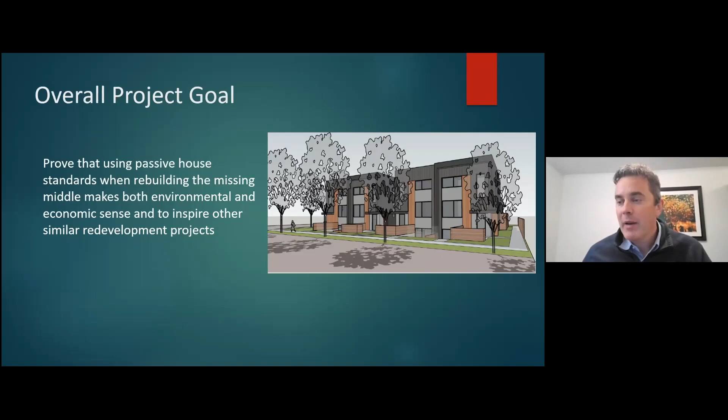But as we're going ahead, there were 3 sub-goals which we tried to achieve throughout this. The first one is to determine what is the marginal cost of doing a passive house build, specifically looking at the mechanical envelope and solar PV. That's something that David's going to walk through later on in this presentation on how we answer that question.

The second one is looking at the 2 different passive house standards that are out there. We've got PHIUS and we've got PHI, and there's many. When we were starting off, quite frequently people said, well, which one are you following? So we explored both, and we're going to walk you through the steps on how we came to our decision on which one we decided to use.

And the third goal that we wanted to achieve was to determine a net zero strategy. Is it possible to reach net zero in our development with passive house? And if not, how close can we get? So those are the 3 goals, and throughout the presentation, we'll be answering these three questions.

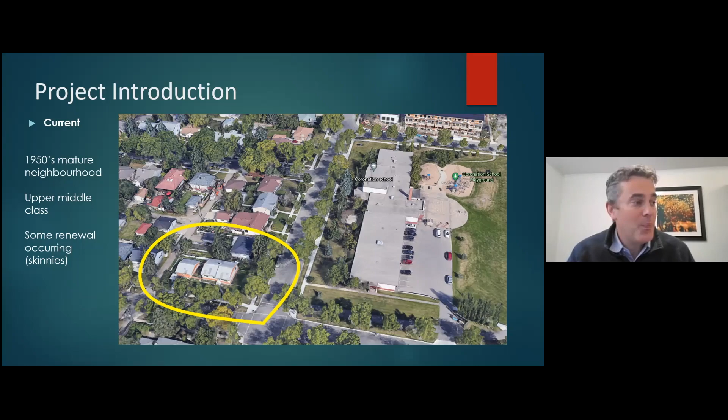We have two city lots adjacent to each other, right across from a school in the middle of a neighborhood. You can see an overview here - it's basically a typical 1950s style bungalow, approximately 2 single family homes, with a total area of 13,500 square feet, side by side adjacent to one another.

We just tore down these homes this past week, so now it's just two empty lots, and we're ready to get going here.

Our vision is to develop a multifamily build of 16 homes, mixed with 1, 2, and 3 bedroom units. They're about 2.5 stories tall, and 2 of the units will be fully accessible. We want to make it accessible and appealing to different segments of society, not targeting one particular group - this can be anywhere from university students to retirees to families, so we want a diverse group of people living here when it's done.

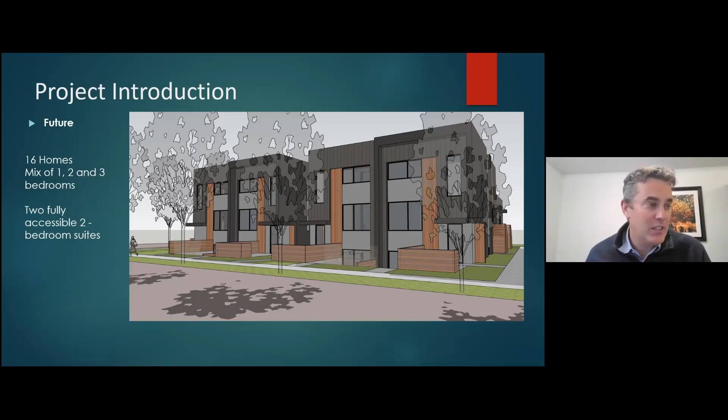David, I don't know if you have any more comments you want to add to this particular picture before we move on. No, I don't think so.

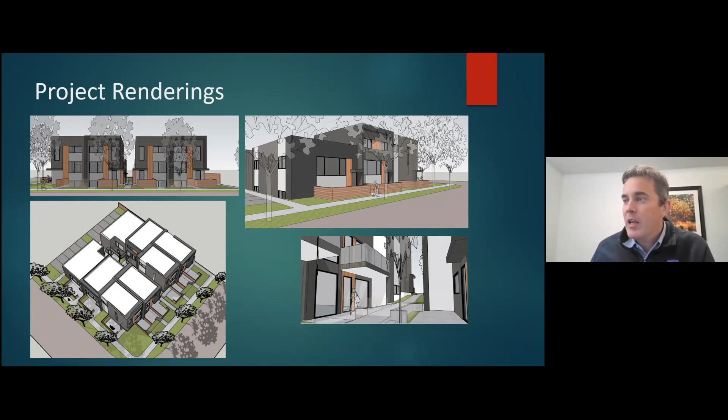I'm trying to go fairly quickly so we can get to some of the technical stuff, because I was told a lot of people on this call might want to know the technicalities of this. So I'm passing this off to David now. Am I not? David, is this where we start with you? Well, I was going to start on the wall systems, but I can start here.

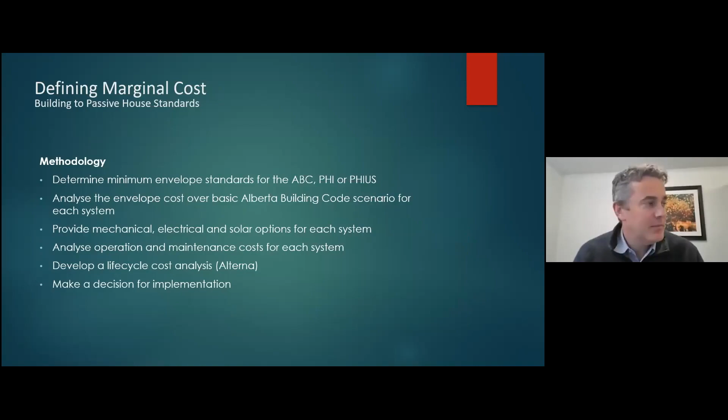Okay, sure. So basically we wanted to define the marginal cost. In order to do that, we had to determine exactly what we were going to build. The methodology we used was to come up with a base Alberta Building Code scenario, then compare everything back against that to get the difference between our proposed systems and the minimum code cost. We started by defining the building envelope and choosing that, then layering on top of that mechanical, electrical, and solar options for each system.

Thomas from Alterna, now with Niche, did a great job for us analyzing not just the installation costs, but also the operation and maintenance costs, and full life cycle costs for each of the systems, so we could make a decision not just on initial cost, but on cost over the whole project.

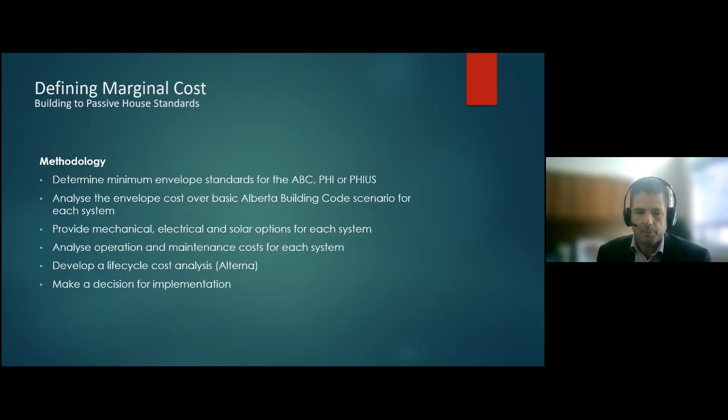For wall systems, we brainstormed some ideas, me and Oscar for the most part, of different ways we could build the wall system for a high performance building. Then Kelly, who's the energy modeler and mechanical engineer, took each proposed system and defined exactly what we would need to meet each standard. So we have a bunch of different wall systems we analyzed, both PHIUS wall types and to meet PHI.

I'll walk through them quick. Envelope 1, we just looked at the basic building code scenario, basically 2x6 walls with batt insulation. Envelope 2, we looked at using a double stud system to meet the PHIUS standards. This ended up being 12.5 inches thick.

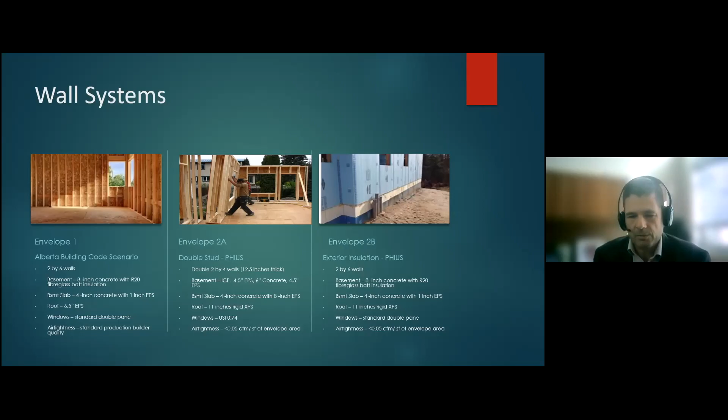I don't want to go into all the detail, but we're using ICF and we have 8 inches of EPS below the slab. Envelope 2B has the insulation on the exterior instead. It meets the same PHIUS standard, but instead of a double stud wall, we've moved to exterior insulation. 2C, we looked at this really innovative building system out of the UK.

They were at least discussing starting a plant in Edmonton at the time. It's similar to a structural insulated panel. I don't want to go into it too much because it quickly got eliminated—it was really expensive. Envelope 2D that we looked at was the SI wall system.

I don't think Mark Cunningham from SI Wall Systems is here, but this is a system mixed of light gauge steel stud embedded in EPS. This required R41 and it met the PHIUS standard. For the basement, they have a system using the same approach rather than a cast-in-place concrete wall system. Envelope 2E, we looked at the PHIUS prescriptive.

This is a program from PHIUS that says if you build to a certain standard, you don't need to do all the in-depth energy modeling and thermal bridge analysis—we've already done it, we know what it is. Just build to this standard and you'd be able to get certified as PHIUS. It's not much different than the double stud wall, but it's actually a little bit higher level.

2F is almost the same as 2D, but we're combining the upper part, the SI wall system with light gauge steel in EPS, with a more traditional ICF foundation. The reason we explored that was to have an option with a concrete foundation rather than light gauge steel and styrofoam, which would be considered outside the norm.

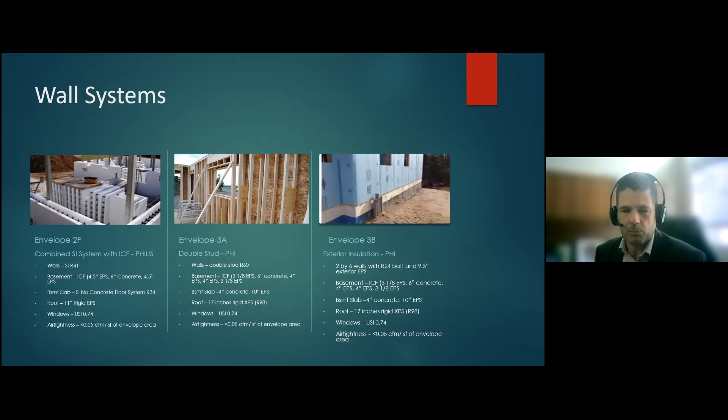3B is the same as earlier with the PHIUS standard, except we have more outboard insulation to meet the higher standard. And this is 3C—this is the mantle system I talked about earlier, but now beefed up a little bit to meet PHI rather than PHIUS.

We did a huge analysis, which we took out of the presentation because it's too hard to see and too big, but basically took costs for everything—framing, insulation—for each component like roof, walls, basement slab, analyzed it all together, and totally costed out the building envelope. We did this when we were getting started on design development, so it's a bit old now—almost a year old—because this was the basis of our decision making.

And then once we made our decision, we've been continuing to move forward without circling back. At the end, I'll go back and update this with the actual cost of what we spent. It's going to be interesting to look back at because prices have changed quite a bit. Lumber was expensive when we did this, but since then it's dropped, and the price of steel and EPS has continued to go up. So if I did this analysis again right now, I bet it would be a little bit different.

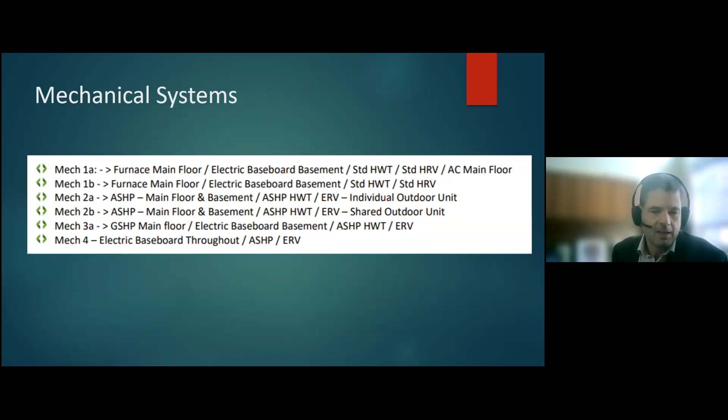Then we started looking at mechanical systems, and I have to credit most of this work to Thomas, along with Kelly, who analyzed all these systems for us. These are the systems we looked at. We looked at one, a traditional furnace on the main floor with electric baseboard in the basement, a standard hot water tank, standard HRV, and AC on the main floor. Mechanical 1B is the same but without the AC. We knew we weren't going to do these systems from the beginning, but we wanted to analyze them so that it gave us a baseline to see what we're spending extra on more high-spec equipment.

Mechanical system number 2A, we looked at air source heat pump, upstairs and downstairs. Basements are like the lower units, so 8 of our units are partially below ground. You could think of it as a traditional basement suite almost, but raised out of the ground more than a full basement. The difference between A and B is in A, each unit had its own outdoor condenser, and in 2B they were shared between the upper and lower units.

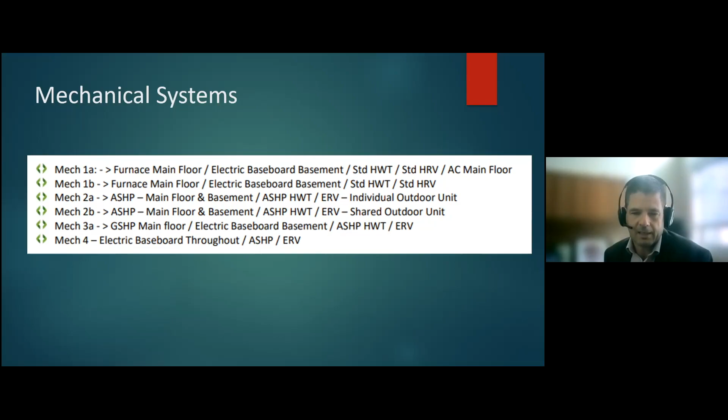System 3A was a ground source heat pump, electric baseboard heat in the basement, and an air source heat pump for the hot water as well, same as in 2A and 2B, plus an ERV. System 4 is just electric baseboard heat throughout with the air source heat pump hot water tank and an ERV. Let's go to the next slide.

So in theory, what I hear a lot is that with passive house, you're going to spend money on the envelope and then save money on the heating and ventilation system, and we wanted to know if that was true. What we actually found, or what Thomas found in the analysis, was that no matter what wall system we chose, the cost to install the heating and ventilation system didn't really change. That was because there aren't many size choices for air source heat pumps, and we end up using the smallest size equipment no matter which wall type we use. If there had been options for smaller equipment, we might have saved some money. So one thing we wanted to consider was whether paying extra for PHI envelope over PHIUS could let us save that money on the heating system, and what we found was that we couldn't.

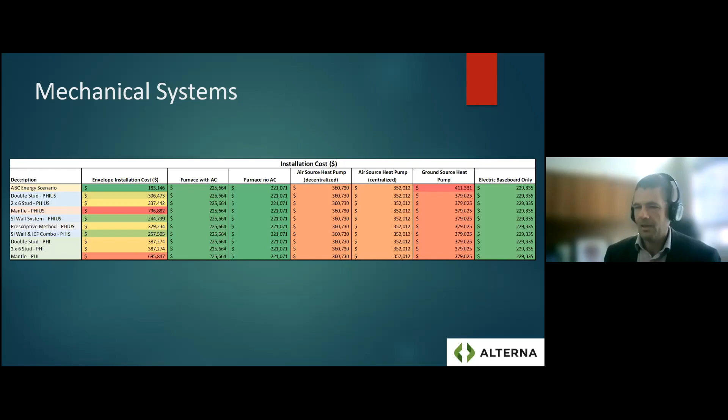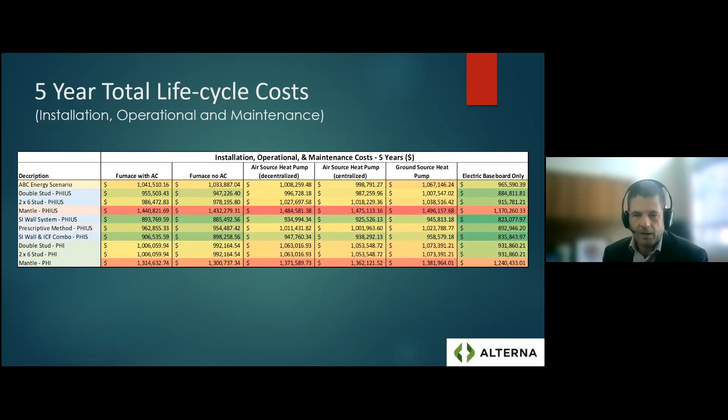This is the same thing, but over 5 years, and you still see the same pattern with the green being in the furnaces and the electric baseboard, but it's getting less so.

No matter how much I pushed back on Kelly, that this couldn't possibly be right, and we definitely don't need AC in the basements, and can we mess with windows, and what else can we do - the answers always came back that this is right. And if we don't do anything with AC, then the units, even in the basements, are going to be uncomfortably hot.

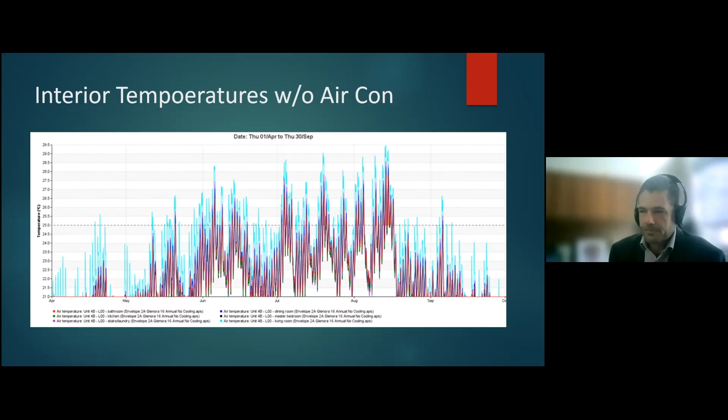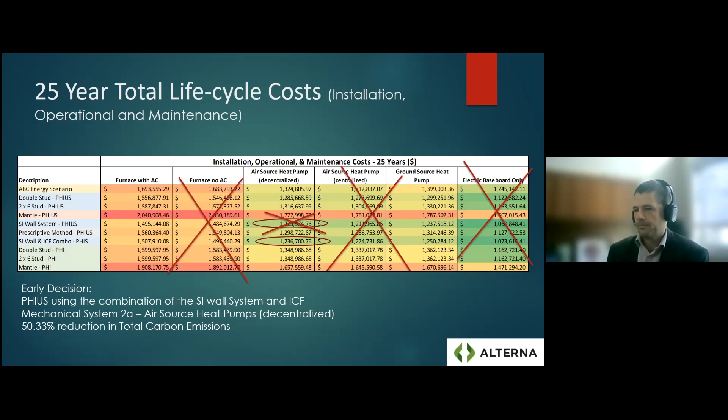I really want to get us all the way to net zero. Our whole team is pretty determined that we put in enough time, effort, energy and funds to get this close - we really want to be able to take it all the way to net zero. This design doesn't get us all the way there, but if we could tighten up the space between the panels and get one more row in there, we would be all the way there. I just haven't found a solar company willing to work with me on that solution yet, but I'm pretty sure it can work with Kuby some more, or work with somebody else, and we can get to that point.

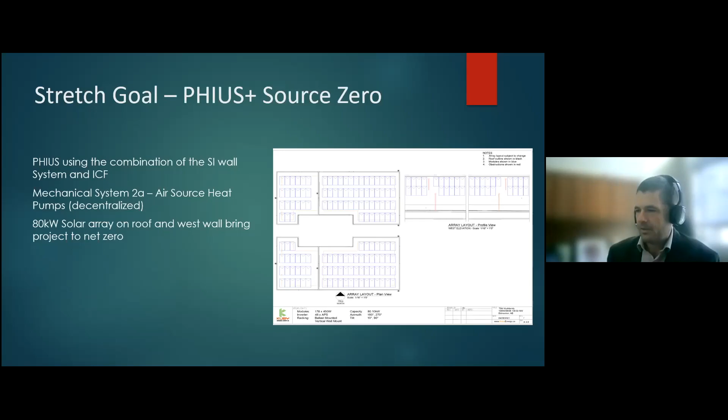The mechanical system was $139,000 extra. I must say we did this a year ago, and prices have changed significantly, especially in the world of heat pumps. So when we refresh this, that mechanical cost is probably at least double that now, probably 250,000 or more.

The envelope additions cost 176,000. The solar PV was 226, and then the total was basically $550,000. It's about a 12% cost premium. Actually, I had said earlier that the envelope costs were about 12% higher, and the entire project costs are actually 12% higher too. So it's basically spread evenly between envelope and the rest of the project.

Evaluate between PHIUS and PHI. We selected PHIUS, but actually on Oscar's recommendation, we're also exploring PHI low energy. I think we'll just do that at the end.